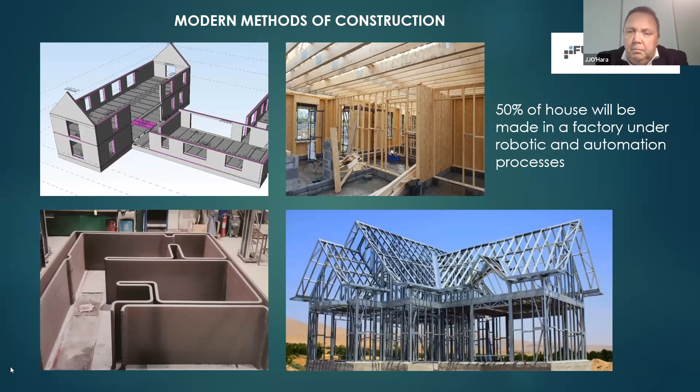We brought in the first 3D printer into Ireland. We have a base there in Drogheda. We're doing education, with about 120 people already put through education on it - one-day courses. Now we're starting a 2-day series, and we'll have a 6-week series later coming in 2023. We printed one story, 2.7, in less than 6 hours, 2 weeks ago. What we're doing is creating something very similar to cavity wall construction already, and just developing that. We've got it through London Building Control, now it's gone through, it's in an NSAI standard at the moment. It's there for anyone to look at up to the 5th of December and to evaluate.

The reality is that in-factory and modular homes is going to come very much into play, with the robotic and automation process. This is a thing called Mega, to build modular houses - it's 60 robots, developed by KUKA, ABB is developing, FANUC is developing different systems. It's really going the way the car industry went before. We're in a place in Ballyjamesduff on Tuesday night with CIF looking at the different developments in this.

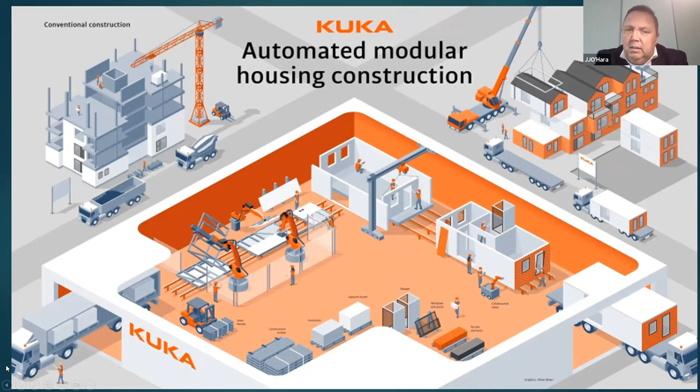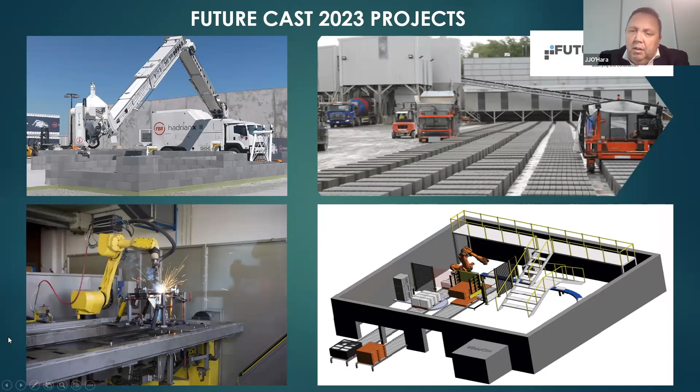Robotic welding as well is coming very much into the steel operation. There are some very good companies designing some brilliant stuff. Pro Design down in Limerick are doing some very interesting steel development within high rise and construction buildings as well.

What we see on the top left-hand corner here is about the innovation, development, and the research and education that we can provide at each of these. So what we developed is some of these machines - look at the design, what is the texture, what is the hydraulics, what are the mechatronics that each of these machines is working with.

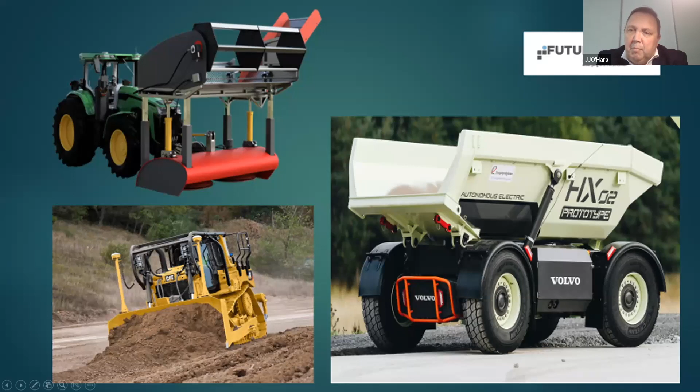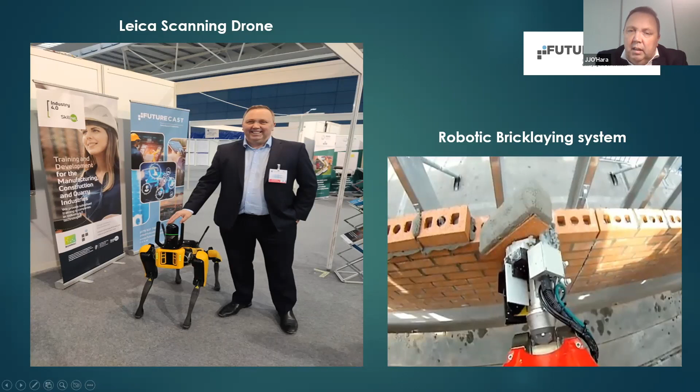So look at what we're saying - there's 30 to 40 different new jobs coming into the industry. It's about adapting our young people to look at these new jobs right across the quarry, construction, and manufacturing supply chain that we see.

But it's also about the person that is leaving the industry. In construction, we lose a lot of our talented staff at 40 years of age. Our thought process here is that talented staff can be retrained in digitization, to go into some of the factories, to look at the robotic process, to work on the 3D printers. It's about thinking outside the box, because we lose a major part of our talent - block layers, plasterers, it takes a toll on the body, bone structure or whatever, and they leave to go to different jobs. We lose that knowledge of our industry. Our thought process is that we retrain them and get another 10 or 15 years out of them.

There's definitely different advancements going on in the courses we're developing, like artificial intelligence in a quarry, and blockchain. We're doing blockchain in health and safety in a quarry, a construction site, and manufacturing. We have our first course coming out this year on blockchain, an introduction to blockchain on a manufacturing site. There's a lot of new advancements and new courses coming out, with our own Industry 4.0 Skillnet and with Cita, working together to look at what the industry of the future looks like. We see robotic processes within construction coming very fast down the line.

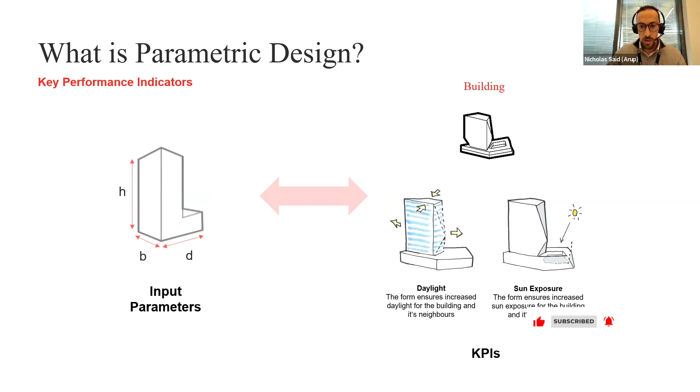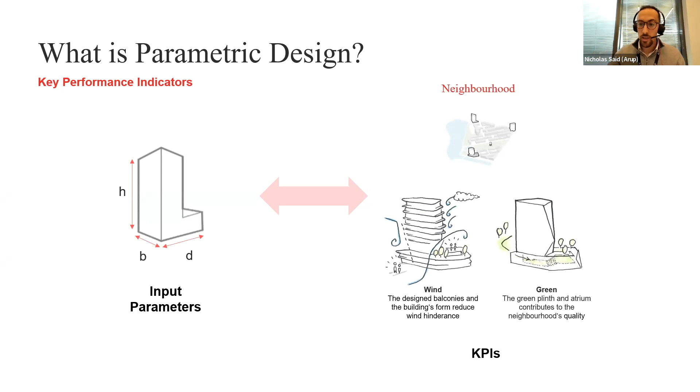Now that was parametric design on a micro level. However, we can take it to the next level, the macro level, and how it would affect the neighborhood. As you change the building shape, it could also have an effect on the wind, creating turbulence behind the building and the surroundings. So this needs to be considered - it's not just the building in isolation, it's everything in the surroundings.

Moving on to a larger scale, we also have an effect on the planet. Arup have committed to calculate embodied carbon emissions for all our projects, and parametric design is an incredibly useful tool for this, as we can find the most efficient solution.

By developing a script which keeps track of all the materials and all the sizes of the members we are inputting, we can also get a figure for the embodied carbon related to our project. We would obviously have limits for each of these projects, so we can tweak these parameters to make sure we are within these limits.

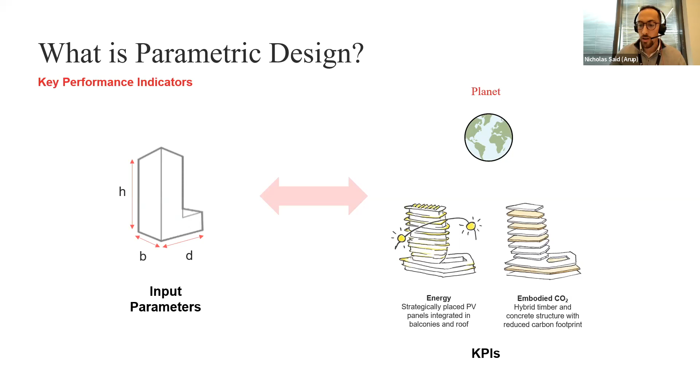It is easier to make changes early on in the project with little cost implications. However, as the project proceeds to the final stages, there are more cost implications and it's harder to make design changes.

So where does parametric design come into this? We start developing parametric design in the early stages, and that's when we can get the most value from it.

Right when we have a discussion with the client to develop what are the KPIs, what will be assessing the building for, we start working our way on the parametric design. This naturally involves effort in the early stages, however you reap the rewards towards the final stage where you can assess a large number of changes through parametric automation.

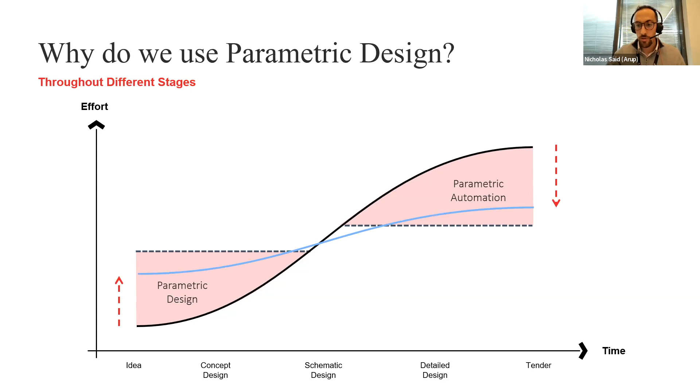So essentially you're extending the design exploration period, whereas in a traditional method you would assess a certain number of changes or options. With parametric design you can assess hundreds, if not thousands, in a shorter period of time. And what happens is that this S-curve essentially becomes a flatter curve, making the process more efficient with less cost implications towards the end as you can assess more changes. So the third question is, how do we use parametric design?

On the left-hand side you normally have variables where you can move around the inputs, and towards the right-hand part of the script you get the outputs, which change in real time. But perhaps the best way to show this is with an example.

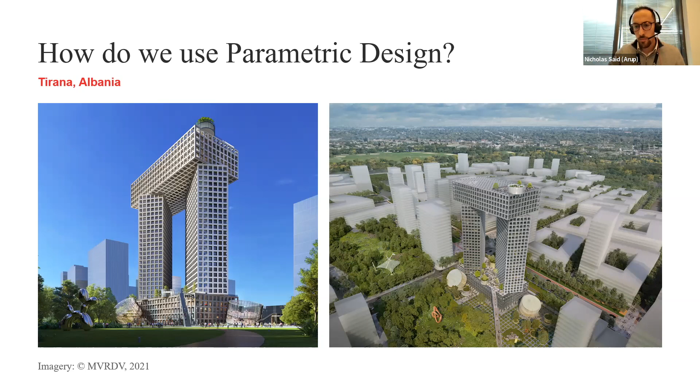What effect would it have on the wind? What effect would it have on the views from the apartment, and so on? So there's quite a few variables that were input in this script.

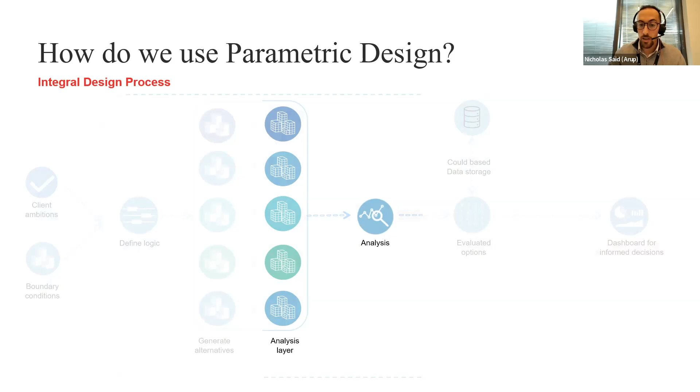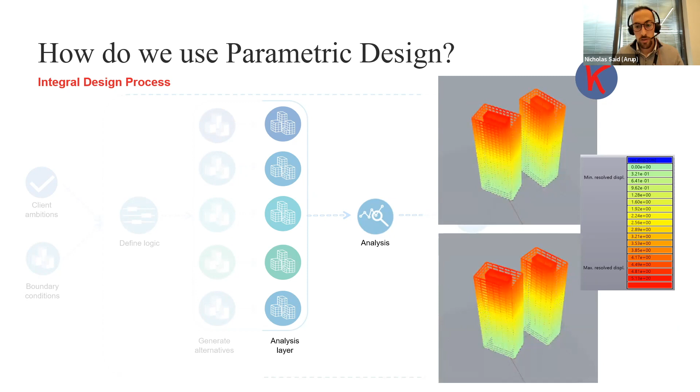However, besides the structural implications of these, there's also things which will affect the client, such as how much of the floor space is taken by the structure. Naturally you'd want more space to be usable rather than taken by the columns. Another KPI would be the embodied carbon - the more material you use, the more embodied carbon related to the project. So how can we optimize the structure to be the most efficient, but also delivering the best results?

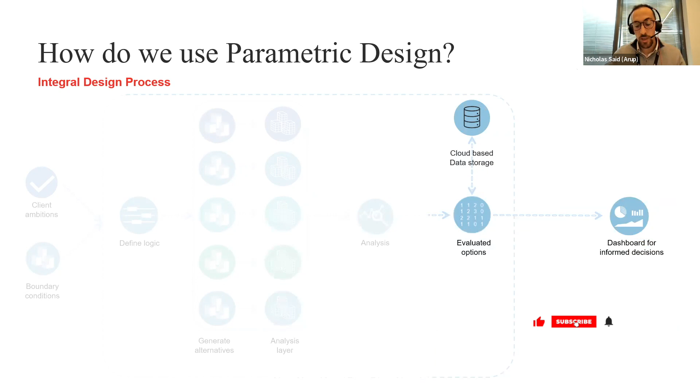And that is the end of my presentation, so I'll pass you on to Simon. Great, thanks Nick for that intro to parametric design.

So what you've just seen is just one part of our more global strategy of automated workflows. A cornerstone of this approach is really to review our workflows to identify opportunities for automation, with the goal to reduce the amount of manual work and spend more time on high value decisions—optioneering, value engineering, things like the parametric workflow Nick just presented—as opposed to moving information from one place to another manually.

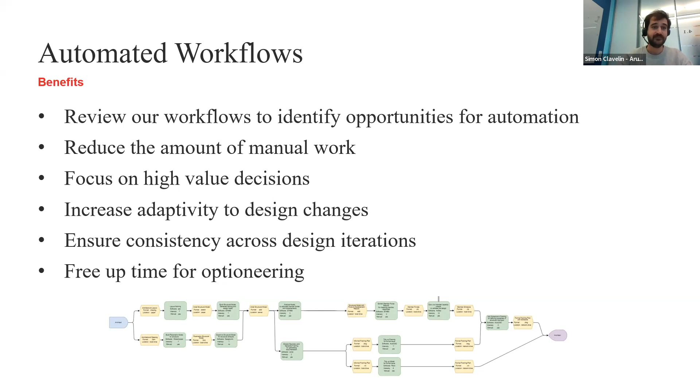That also ensures consistency across our design iterations, so we're always doing things in the same manner. So to achieve this, first we need to review our workflow and identify the opportunities, then implement a way to standardize these workflows, and also have each piece of this workflow communicate together—so they need to be interoperable.

However, in many of our processes we use commercial software packages that may not be able to be integrated within a workflow—say they are a black box. You need to input data into them manually, and you get an output that you cannot actually pass on to the next block of our workflow.

So we're trying to tackle these key issues at Arup, and one of our approaches is to actually develop our own in-house calculations, which we've called Design Check. Essentially what we're doing is creating those calculations that we need to integrate in the workflows ourselves, which allows us to really control the way we get calculation reports out of them.

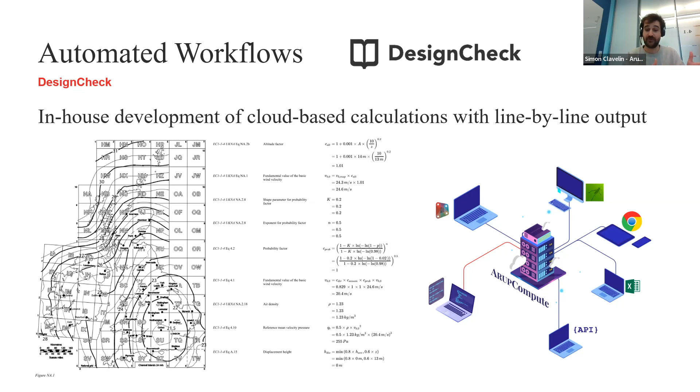The advantage as well is that we can connect them in our workflows in many different ways. We can go and fetch calculations from Dynamo, use that in Grasshopper, we have a browser solution for quick calcs, we can call these calculations into Excel, and always have that consistent, clear output. That really solves a key issue in trying to put workflows together—we can always have a flow of information from one to another.

So an example we've used that on is presented here—it's an office refurbishment in Dublin. It's an existing building, and what we're doing is adding two stories on top of that existing six-story office building. What we really wanted to do here is assess the reinforcement needed for the existing structure to take on the additional loads, and have a really granular view of what that needed to be, to save both cost and time.

In that way, as opposed to approaching a building design from more of an engineering judgment point of view, we really wanted a clear view of all the existing columns and how they were handling the new loads. So we've created an integrated workflow that starts with a structural analysis model—we use GSA, that's our in-house software.

We built a structural analysis model with it. We analyze it, we get loads, and then we use, say, Grasshopper to create a link between those results and our calculations in DesignCheck.

So you have a seamless transfer of information between the structural analysis model through Grasshopper and onto DesignCheck, which generates dozens upon dozens of calculations very quickly. And if there's anything you want to review in more depth, you can always generate reports for each of these individual calculations. So you have a quick example here.

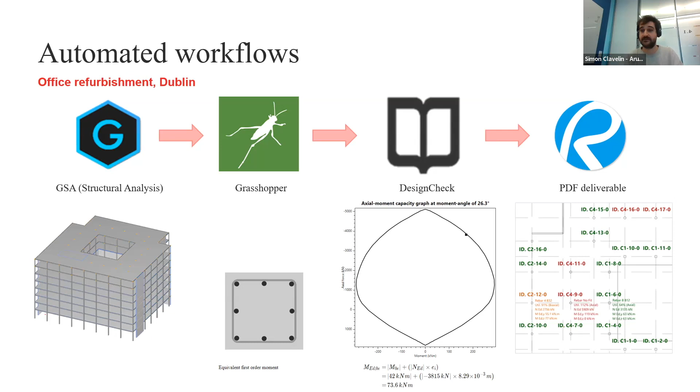All of this we're doing automatically, and that allows us to save time, to actually interrogate our results more. So perhaps there's something we didn't notice at first, but we get odd results on a column that we wouldn't perhaps have looked at otherwise. We get more time doing this and taking the right decisions for our clients and ultimately our design.

So I think that's about it for the overview of how we use automation as structural engineers and how we integrate them in our everyday workflows. Yeah, thank you very much for listening.

Thank you so much. I've actually got a Simon and a Nicholas at home as well, actually. So it's a matter of interest - I have 2 boys, Simon and Nicholas, so that's interesting.

Very good, so much to learn from that process you've just gone through. I just put a comment in the chat about our profession, quantity surveying, and why we still have to be so preoccupied with quantification when we've got tools like Grasshopper that can work some of this out for us. My question to you both - it was fascinating. I can see the logic here of automation design, addressing and locating, I suppose, optimal solutions. Could it be that the machines, or the algorithmic processes, would actually select a better design option than a human would?

That's a very good point, Alan. I think there's an important point to highlight though, that there's always engineering judgment that comes into this. It's not just the computer that does all the work. So say one person develops the parametric script, there's always peer reviews - we would select someone who has proficient knowledge in these programs to actually check these scripts. And it's also a cross comparison, so we'd have more in-depth computer models or even hand calculations that we would check. So I think we mustn't forget there's the human aspect to it - that's where the engineering judgment comes in.

There we go. Okay, well, I hope you guys can hear me okay. Thank you very much, Alan. I appreciate it. You were loud and clear. Thank you very much. It's been a very interesting session so far. So thank you very much. Very welcome. My name is Matthew.

Let me take you through a couple of things we're going to talk about today. I'm going to talk mostly about Leica BLK autonomy and its vision. I'm going to introduce you to the fleet, talk about myself a little bit. Also looking at the BLK autonomy overview, what is in the hardware, the software, and the mission planning. We're looking at some of our integration partners that are speaking to these robotic modules that we've brought out, and then looking at some case studies within construction and how they actually use these modules to take people out of risky situations, reduce their staff requirement, and gather data to make more valuable decisions based on the data that they gather.

So the Leica BLK autonomy vision is basically to make reality capture fully autonomous. That is everything from data acquisition to processing, and then creating deliverables, insights, and experiences based on the data that we gather. Looking at BLK autonomy specifically, it's robots and platforms that require no human intervention. It basically focuses on our GrandSLAM technology, real-time laser scanning, and then artificial intelligence and machine learning enable data processing. Autonomy is how these robots, sensors and platforms work together to create a homogeneous autonomous system for reality capture.

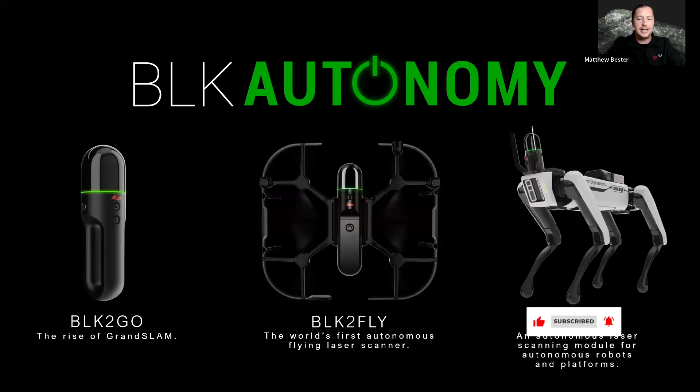A little bit about me: I'm Matthew Bester. I've got 8 years working with SLAM-based systems. I focus on business development in autonomy in the UK, Ireland space, and I'm based in Nottingham in the UK.

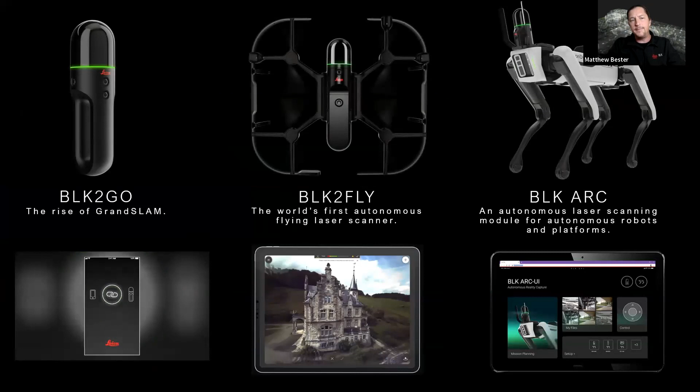Looking at these systems, they all generate their own Wi-Fi. This allows us to connect to them with a bespoke app, and that app will then control and give feedback on those systems. The BLK2GO, for instance, which is a handheld unit, we can walk around an environment completely with the system in our hand, and at the same time, while you're walking, it generates a 3D point cloud, as well as capturing 270-degree panoramics every single second. The same thing applies for the BLK2FLY autonomous system.

If you're looking at the control feature there from an iPad perspective, you only select on the facade or the rooftop with your finger where you want this to scan. It autonomously creates a flight path and autonomously executes that, capturing the data. You can then fill in the data by just tapping on certain areas that you might have missed.

And then also the robotics module, the BLK ARC, is also being used with a user interface that's iPad-based. So if your robot is connected to a 5G network, for instance, on the construction site, you can control this robot from anywhere in the world via this interface.

So all of these interfaces actually link up to the cloud. So once they've captured data, they've got the ability to upload immediately into the cloud, process the data, mesh the data, and make it available for collaboration. So that is quite a nice feature which we've built into these.

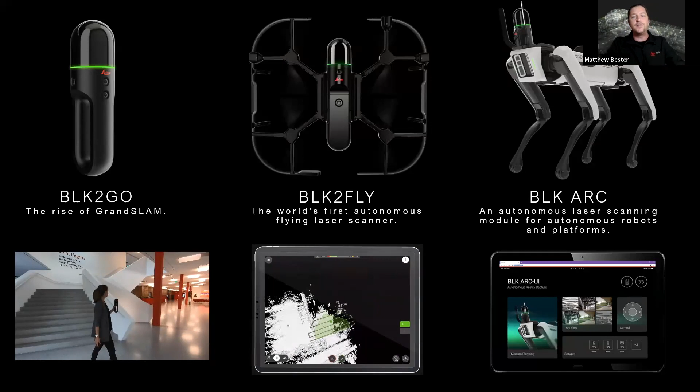So I've talked a little bit about GrandSLAM, let me delve into that a little bit more. The technology that allows these systems to become mobile, move around an environment without the need of a tripod, is called SLAM - simultaneous localization and mapping. It's a robotics algorithm that gives this instrument awareness of the environment. Using an IMU, an inertial measurement unit, and the laser measurements, all working together with this algorithm and some AI and machine learning, it will actually start generating a 3D point cloud on the move.

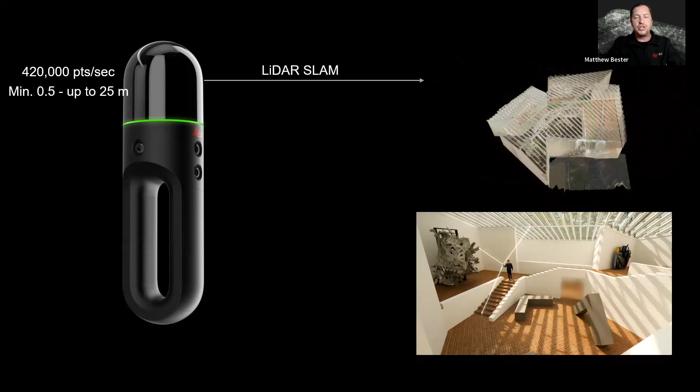With the camera system that we have on board and all of these systems, we actually use the cameras as well, taking photos every single second to look at edges, corners, planes, color variations, to triangulate the system and strengthen that odometry. So this system can now move through any environment and capture a 3D point cloud very accurately, up to 25 meters as you move, 420,000 points per second, and then also capture the relevant pictures that we stitch together to give you panoramics.

So the LiDAR SLAM plus the visual SLAM and the IMU that we have in all these units generate what we call the Grand Slam, which is an industry first, using both of these SLAM technologies together.

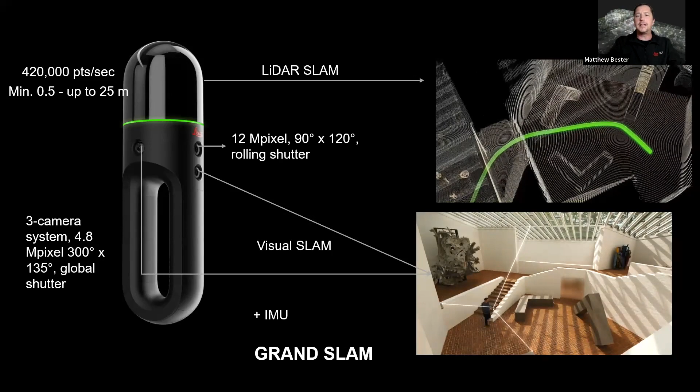In all of these systems, there's a 12 megapixel high resolution camera that can actually take pictures anywhere along the route, and that is anchored within that 3D space. So if you're doing certain quantity surveying, and you want to understand how many fire hydrants are there on a floor level, taking a picture with each of these units will actually locate those pictures in that 3D space, and you'll be able to tabulate them in the report that's generated.

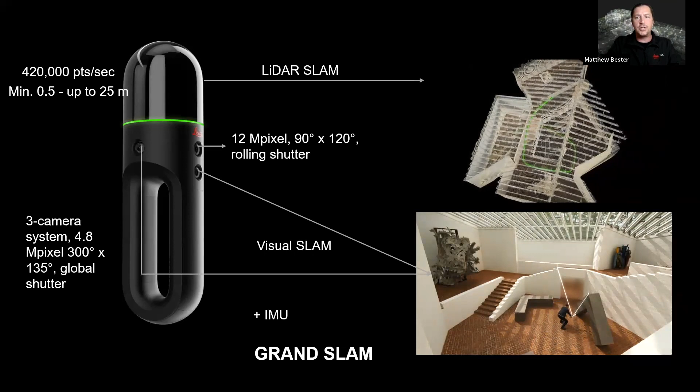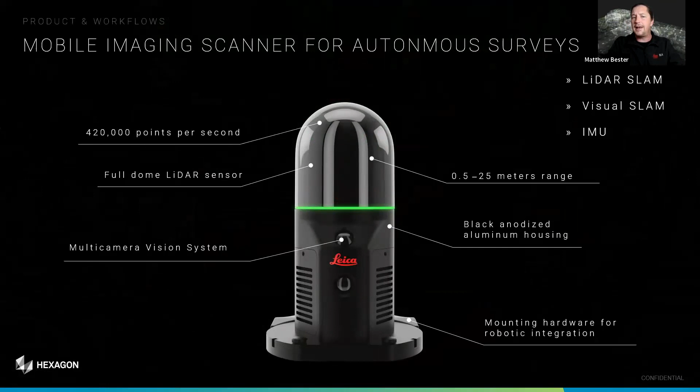So the main thing I want to focus on today is the BLK ARC, which is the autonomy reality capture system, talking about robotics. It's got exactly the same features as the other systems - the 420,000 points per second, IMU, SLAM, Grand SLAM system. It's autonomous, it's safe, but not just being safe, it also makes sure that the people on the construction site or the plants or wherever it's used is also safe.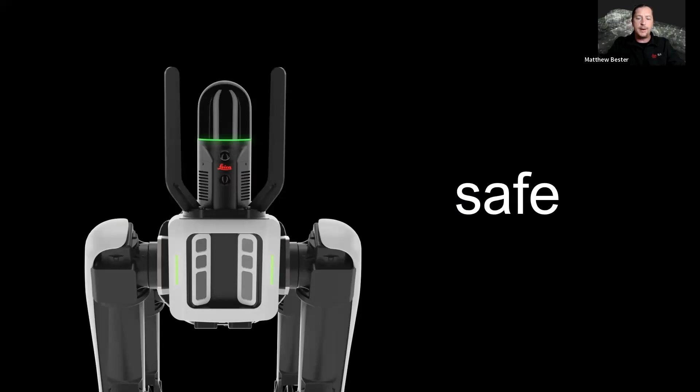So removing people from risky environments - that's one of the main reasons we've built these units, to enable data capture in areas where humans can't go. It's also got the 3 panoramic cameras for the visual SLAM and the high resolution camera in the front. It has the dual axis LiDAR, which is a bespoke LiDAR created by Leica Geosystems that allows you to capture the environment as you move along.

These systems are integrated, so we generate what we call colorized point clouds, which gives you additional visual context when you view these 3D models. We are making sure that it's well protected, making sure that it's got some roll bars, if you'd like. And it all fits into a very nice backpack - that's excluding the dog, I must add. So the system fits into a nice backpack.

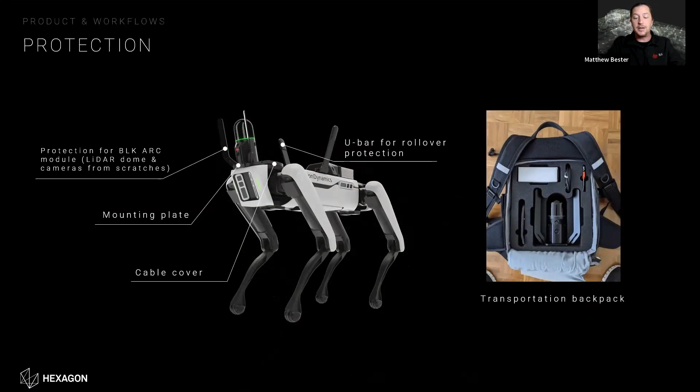So once again, this is a robotics module, it can fit into any type of system. The system allows us to do mobile and static scans - scanning while you walk, but also having static scans at specific areas to increase the density and increase the visualization of that area. So if there's a specific area you want to monitor for how the actual construction progress has been done, or deviation analysis, you can actually stop and gather more data there.

Once again, it's all controlled via a very usable, user-friendly interface on an iPad. Anything that can connect to a browser is where you can connect this user interface to. How we do that is we create offline missions.

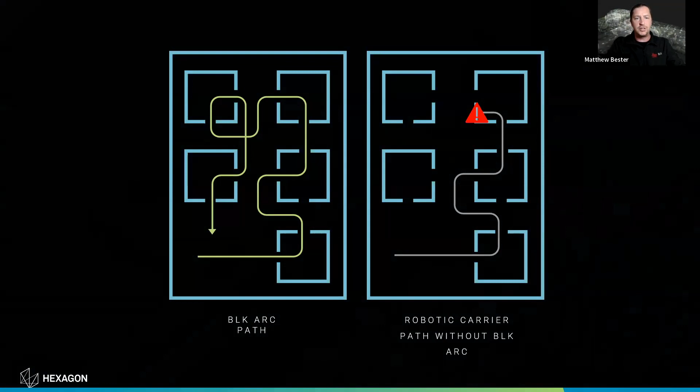These offline missions allow the Boston Dynamics dog to actually move through the environment with its onboard collision avoidance systems, but follow the instructions we've given it through the BLK ARC system. We can do that various ways. We can take a 2D floor plan of an environment and create polygons with waypoints, or use a 3D building plan or BIM model of that specific area and create waypoints that way. Or if you have a point cloud captured by any other system, we can also generate those missions for the robotic unit to go through.

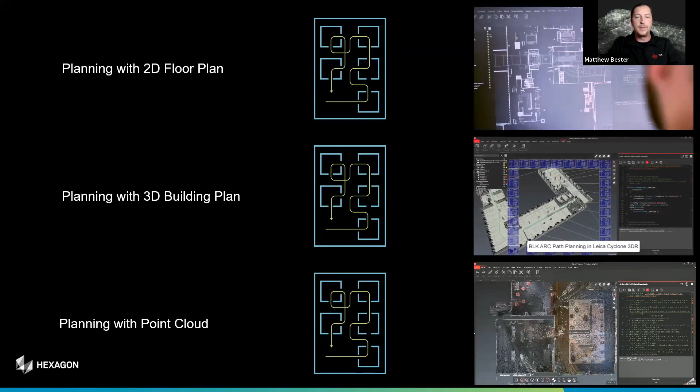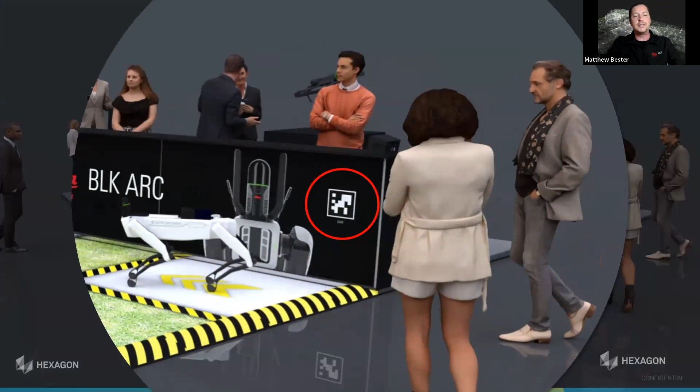How we orientate that is by using a fiducial marker, which is a Boston Dynamics standard fiducial marker 200. Once the dog sees that the mission is loaded, it will start following that mission using its onboard sensors to navigate around obstacles. If it's blocked, it will try to navigate around to the next waypoint and complete the mission, all the time capturing 3D data for you.

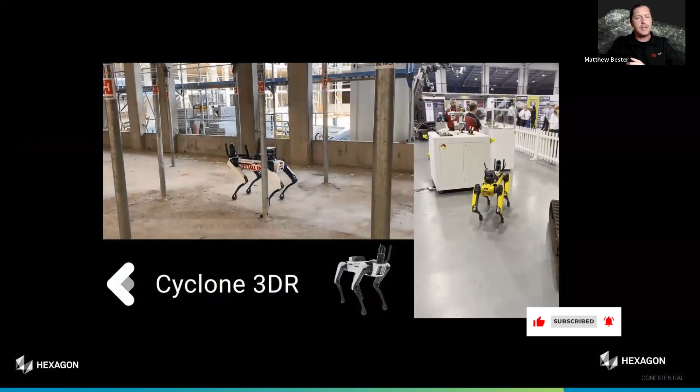In this specific instance, on the right-hand side, the dog, or the BLK ARC, is capturing data, following a mission. On the left-hand side is where we've planned that specific mission, or a mission like it. You'll see autonomous data capture happening in that planned area, walking around the buckets and these types of things.

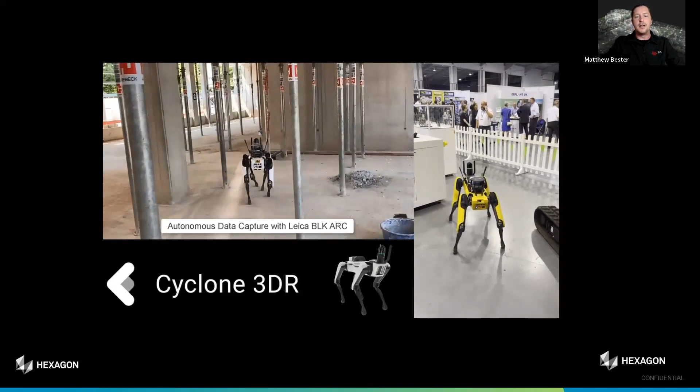On the right-hand side, that stiff leg approach is called tripod mode. That's a high density scan being done at that moment of the environment, so there's more data being captured to have better measurements and comparison.

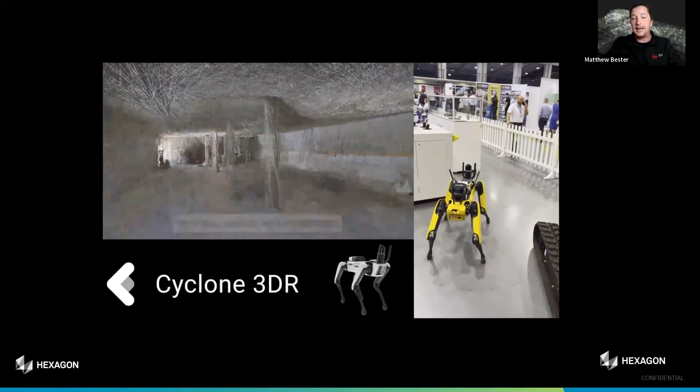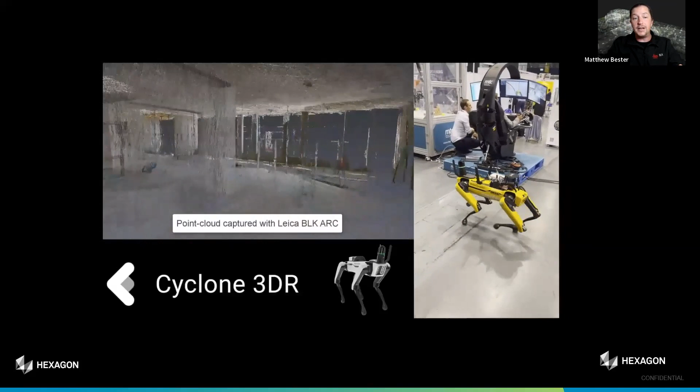Once the data has been captured, that point cloud is ingested back into the software, and that can be downloaded via Wi-Fi. So you don't need to actually go and plug it in. If you're sitting in Sydney, Australia, and this is happening in Los Angeles, you can download the data.

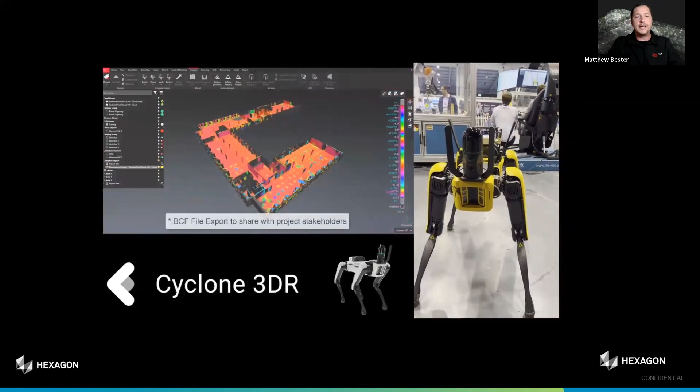And you can then start doing scan-to-BIM analysis: progress monitoring, deviation analysis, clash detection, whatever you want to do with that specific data set you've captured. You could also export that in BCF file formats to share with other cloud users. We want to keep that sharing quite open on the cloud platforms.

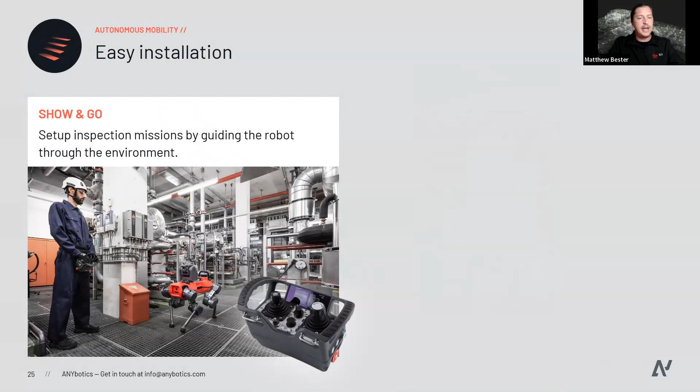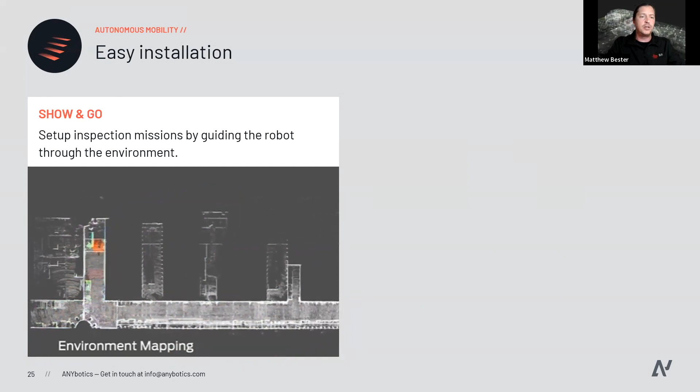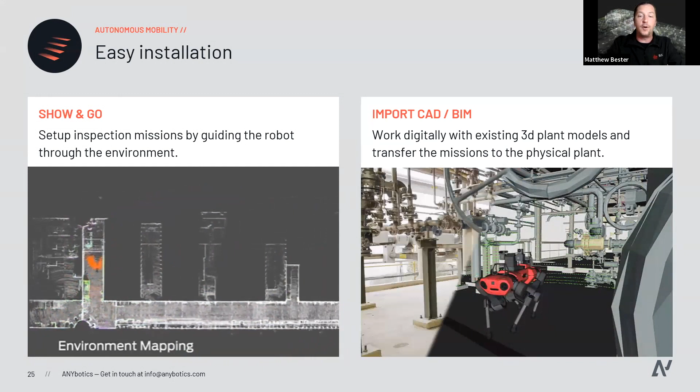Another platform we have, called the ANYmal from ANYbotics, uses a show-and-go system. So walking the robot in the area, it remembers the area, and from there it can execute that mission autonomously. The robot can also use a CAD model or BIM model where you can place that polygon, or the waypoints or breadcrumbs, for this quadruped, which will then follow that specific route. That's another way you can do off-site or offline planning of the actual missions.

Once you've done that, the platform can walk around the facility, up and downstairs, and capture the data at the areas you wanted. So repetitive tasks: are these columns in the right place? Are they in place? Has MEP been installed? Whichever it may be, that's uploaded automatically to the user, ready for collaboration.

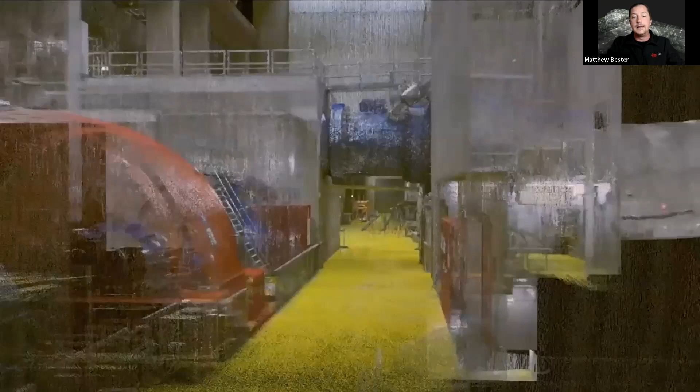And the data can then be used. As you can see, that's a colorized point cloud from the BLK ARC in a plant environment, automatically ready to share. So we've got various software workflows. Normally it's the Cyclone Register 360, which people would be familiar with in the Leica Geosystems space, but there's also collaboration, meshing, and modeling software that follows that.

Normally you'll do your mission planning, then the data collection through the autonomous mission. And then there are two work streams. The first would be desktop-based. If you're looking not to have the data leave site, for instance, and do immediate data analysis, you can follow the normal desktop version. That will basically be dragging and dropping the B2G file, generated by the BLK ARC, into Cyclone, which is automatically processed.

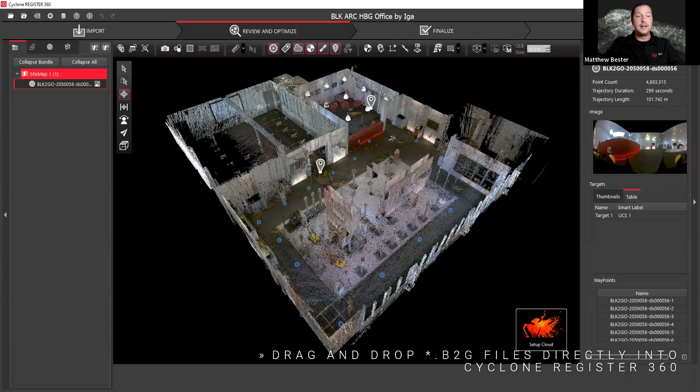From there, you can push it over to Cyclone 3DR for data analysis, meshing, comparing it to your IFC models that you currently have of a BIM model, and then doing certain reports and then pushing that back out to the stakeholders. So that's quite a handy feature to have.

Once again, we want to make sure that we address all the cloud platforms out there. So BCF, IFC classifications, all of these things are exportable from our software to make sure that collaboration takes place across the platforms that are available.

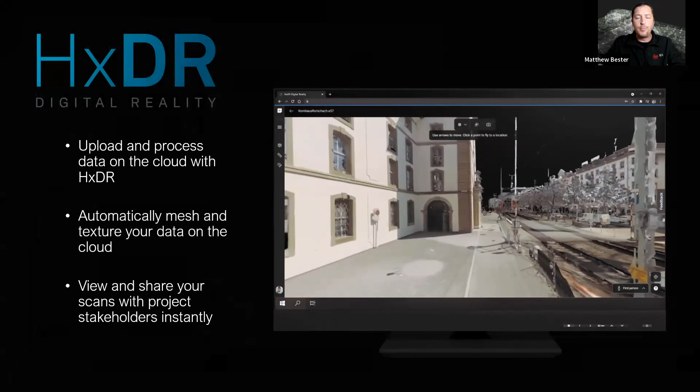The other workflow that we can look at is HXDR, which is Hexagon's digital reality. This will allow the mission to take place, and through the Wi-Fi, or let's say, for instance, the robotic unit is connected to a 5G network, it uploads those captured files automatically into HXDR, where it's automatically processed, automatically meshed, and then from there collaboration can happen.

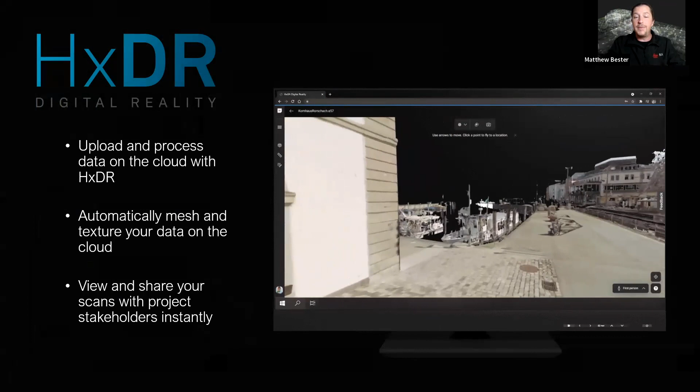You can do basic measurements, you can import certain things, clash detection, and progress monitoring will also be coming into the platform very soon. And then also, you can have certain views.

This is data captured with a BLK 360, for instance, in an E57 format, which allows you to actually navigate through the environment on the setups that were done. And this is all within HXDR, and you can then navigate the environment for visual inspection or whichever it may be.

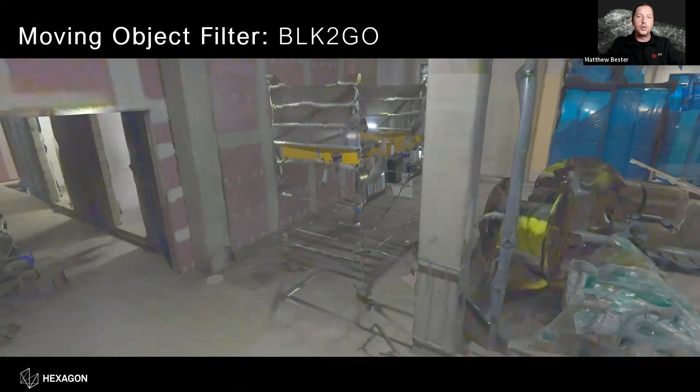Some clever filtering. There's normally some noise when, if the robot has gone through a construction site that's quite crowded, there might be some data that's picked up, moving people, whichever it may be. So we've got automatic filtering algorithms that look at filtering the data out in various ways, either the BLK ARC or BLK2GO or BLK2FLY, whichever it may be. It clears that out automatically to make data integrity quite high on the list.

So we've not just got Boston Dynamics, we've got other integration partners like, for instance, Createc. Createc is a company that is local to Britain. They are focusing specifically on gamma radiation in the nuclear space. So they do sensor fusion by using the BLK ARC for capturing 3D data and then using gamma radiation to overlay that on the 3D space to understand where the radiation is coming from, leaks, hotspots, and the like. So they are quite active in the nuclear space, for instance.

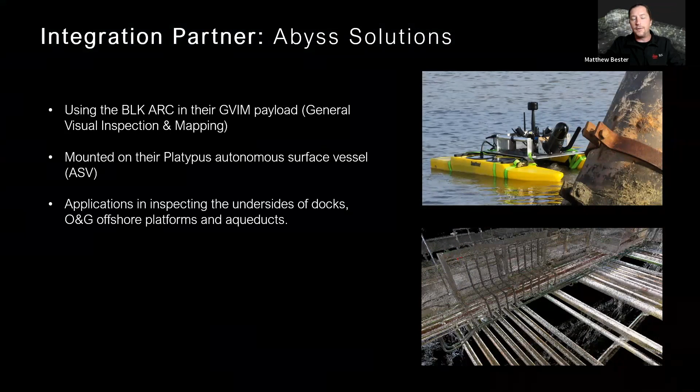We've got a company called Abyss that's using their platform called the Platypus, and that is used for rust inspection and other inspection into docks, offshore oil rigs, and these types of things, looking at what is the status of these installations. It does eliminate a lot of safety issues, and in a lot of these times you will find that we're around about 7 times faster than they would normal tripod or a manual process. So first of all, we eliminate the person out of the risky environment, but we're also much quicker.

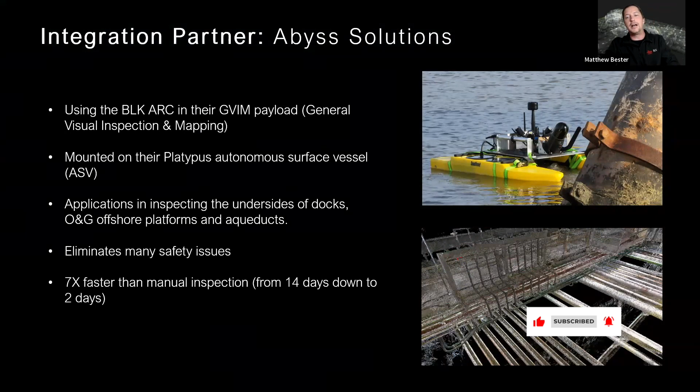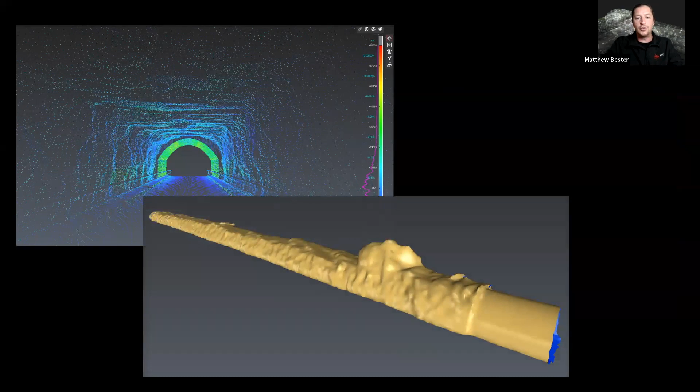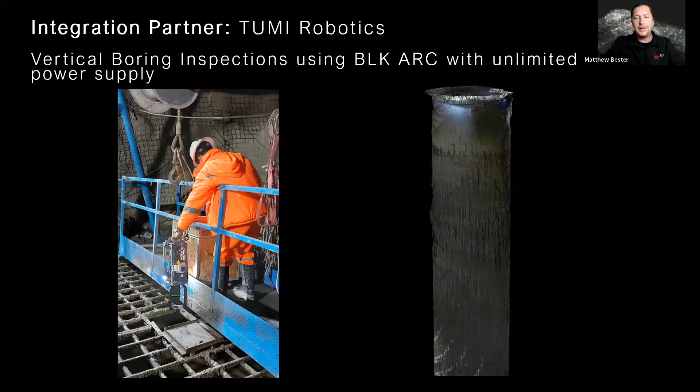A meshed tunnel, for instance, looking at overbreak, underbreak, for the geological guys to look at rock stability and the like. But also, if you're looking at vertical stuff, be it elevator lifts or manholes or whatever it may be, if you want to understand the structures, that can also then be lowered down these structures to capture data in 3D and understand that better.

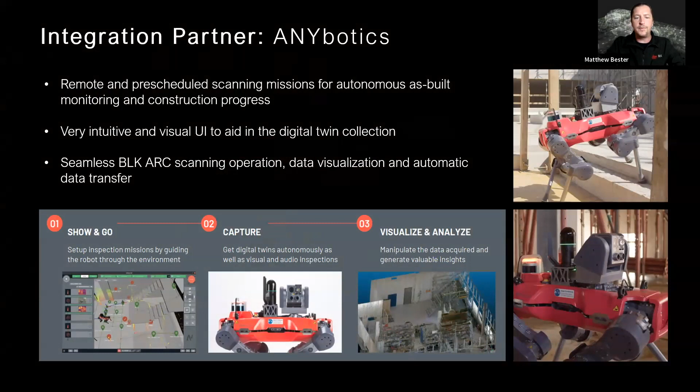So ANYbotics, as I've mentioned, this is one of the other quadrupeds that we've used. Very unique system, as it basically has got the show and go from an autonomy perspective. It captures not just the 3D point cloud that is enabled by the BLK ARC, but also it's got thermal imagery, very high resolution imagery, and it also actually picks up audio.

So listening, is the generator running? Is there a specific sound? Some maintenance people would actually have an ear for if the engine is running in the right way. So a lot of applications for this type of unit.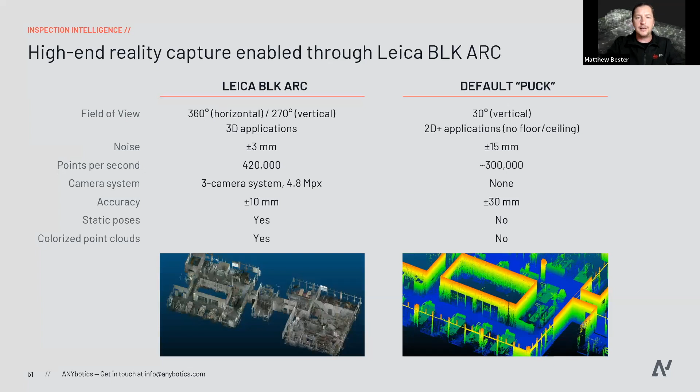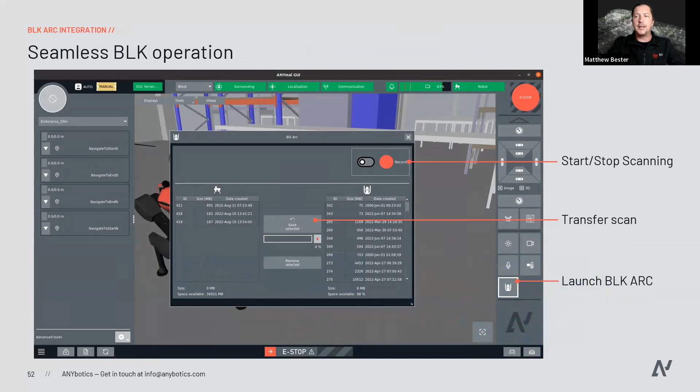But with the BLK ARC, it's a laser scanning system where you want accuracy, and once again, seamless integration into their workflow. One thing with the BLK ARC is that we've got an API available where you can start, stop, pull data from the scanner, so that can be integrated into any other type of platform that can call on APIs.

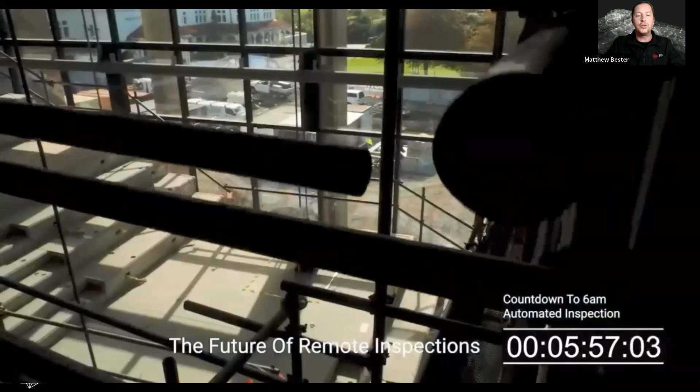DroneDeploy is another company that uses the BLK ARC for autonomous missions. Also looking at sensor fusion. When I talk about sensor fusion, I'm talking about additional payloads onto the robotic platform, where they can take, for instance in this specific instance, a 360 camera, where they will do more 360 panoramics of an area, at the same time capturing 3D data.

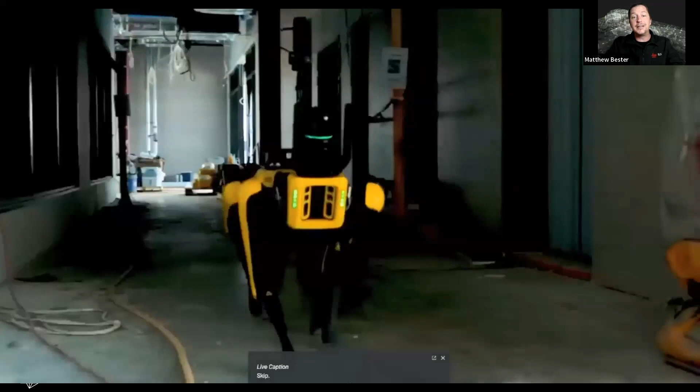And that is for automatic inspections. So are there things that have fallen over? Are there areas that they need to focus on that's not been completed yet according to the site plan? Are there high-risk areas that need to be investigated? So combining these two sensors, they can actually constantly focus on capturing data.

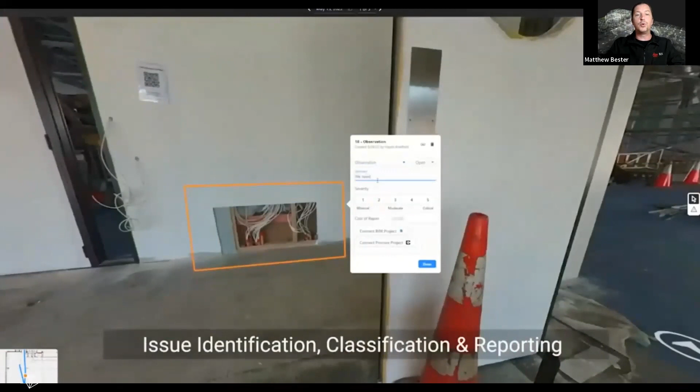As you can see, there's a docking station. So if you have got these docking stations planted all over the place, you can actually run these autonomous missions quite effectively from a remote site. And once again, they use this for issue identification and classification reporting, as well as remote rectification reports and these types of things. So was the work done or not, and update that from a central operating center.

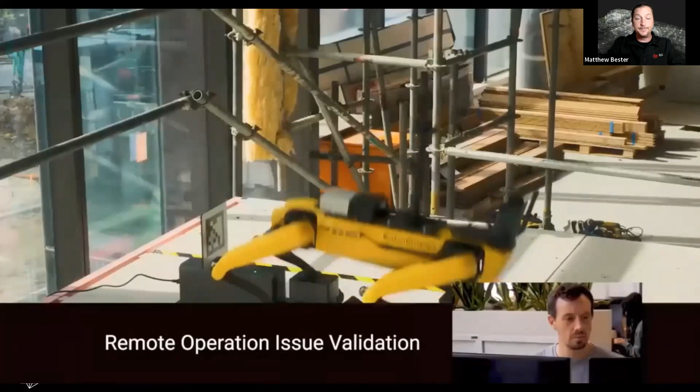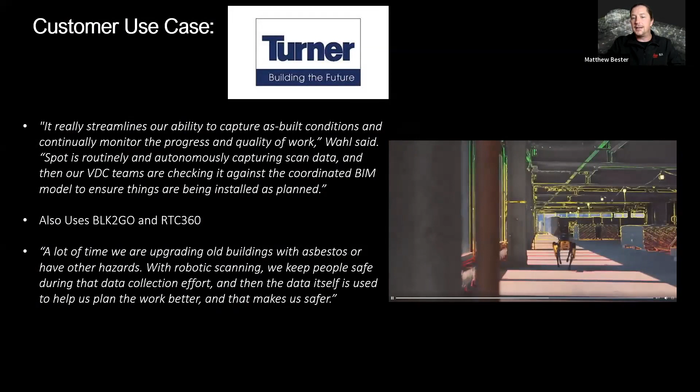Some of the use cases that I'll quickly go through: we've got Turner Construction, looking at making sure that they give the robotic module a lot of work for routine, mundane stuff. And that is for the VDC teams to check that everything, according to the BIM model, has been done as said it would be done. Places that are ridden with asbestos, old buildings, when you're looking at renovations or decommissioning or demolishing, you would actually send in something that's not a human life. These clients regularly use things like the BLK2GO, the handheld system, as well as the tripod-based system.

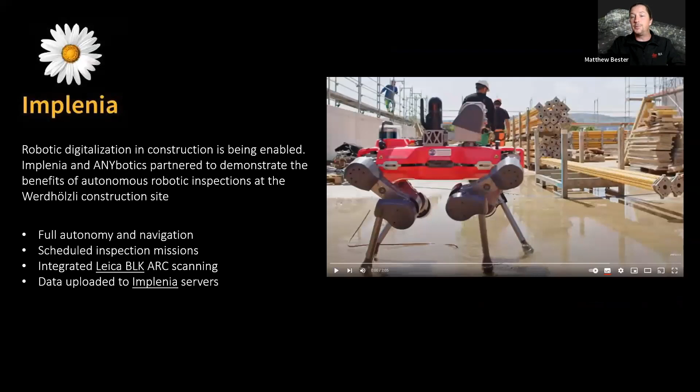RTC 360. Implenia, they also use the BLK ARC on the ANYbotics ANYmal, and that's looking for full autonomy, looking at scheduled inspection missions, making sure that everything has been installed that said would be installed, and then some other large contractors within the US as well, looking at those autonomous tasks, those monotonous tasks, looking at inspection, taking the person out of the environment, and then getting that data straight away without it having been delayed or having something missed.

And Alan, I see you looking at me, so I'll— No, you're okay. I'm okay. Yeah, you're okay.

So Pomerleau, another specific customer that has used the BLK system. Immediate value that they started seeing was data capture in places that humans couldn't go. They could remotely monitor the project, which is a great feature, especially when people have left site, and you can have an additional workhorse that doesn't strike or need a lunch break. And then field validation against the design model, which is the most common use that we see in this specific technology.

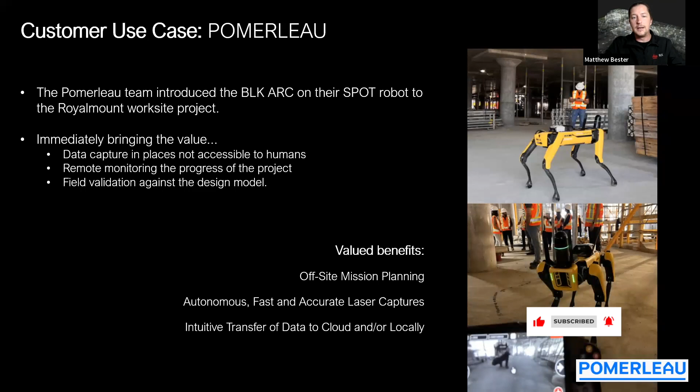One thing that I want to go to: General Motors, also a very avid user of Leica. They basically would use the BLK ARC system to go and scan their plant in areas, while other surveyors are looking at high accuracy areas that they need to capture. So it's horses for courses at the end of the day. If you want to send out the dog and make sure that there's other areas that would take a long time to get to or need regular inspection, you can actually use BLK ARC for that.

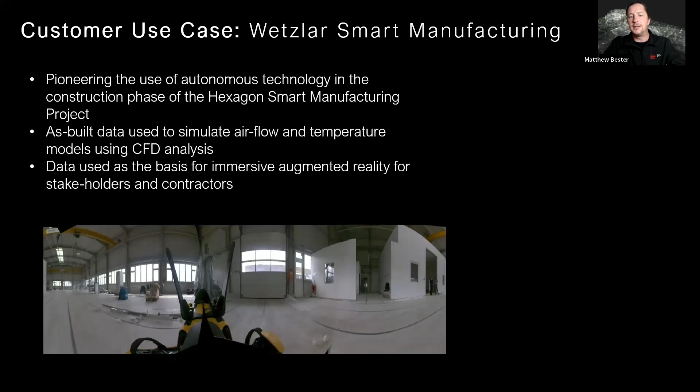This one is quite interesting. I would like to look at where the Hexagon Smart Manufacturing has been introduced. Leica Geosystems is part of Hexagon, the larger Hexagon, and we've got a very large suite of software that looks after various things—certainly computational fluid dynamics, looking at how the building would react while it's still within a specific phase. So looking at these simulations, I don't have that simulation that's playing at the moment.

Basically what the simulation would show is... sorry, that's mine. We need to start wrapping up soon, Matthew. Yeah, certainly, no problem. Is my screen sharing off? Yes, it is. Okay, certainly.

With this computational fluid dynamics, we can overlay things that implement the cooling mechanisms or effectiveness of the aircon systems, done in an AR specific way, looking at the real environment from the design model to see how cooling or heating would be effective, how smoke will dissipate through a building. That's what our technology is used for, all in an autonomous way.